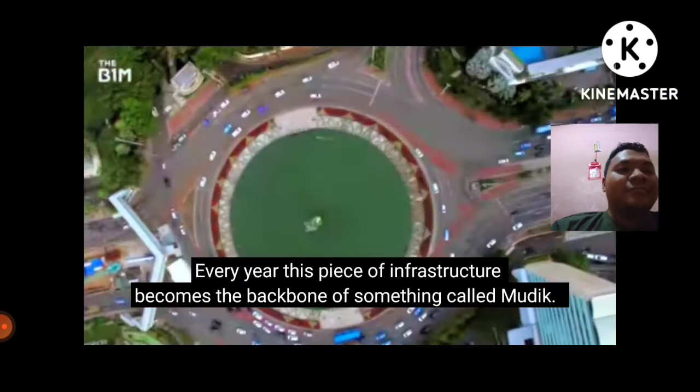Biggest annual migrations of people anywhere on Earth. Millions of Indonesians have started leaving urban centers for their hometowns and villages ahead of the Muslim holiday season of Eid. Every year, this piece of infrastructure becomes the backbone of something called Mudik, a giant homecoming for people all across Indonesia travelling back for Eid al-Fitr. Special services are laid on for trains, ferries and planes.

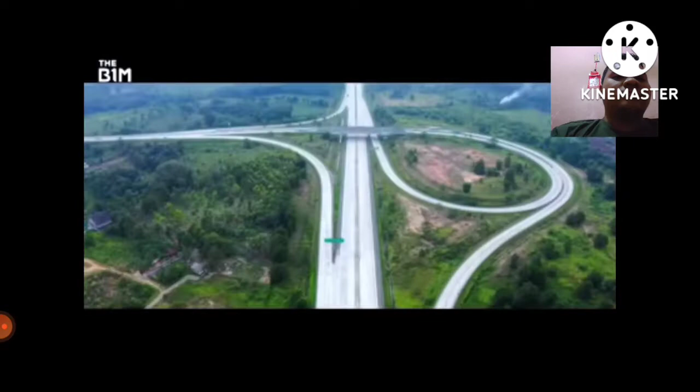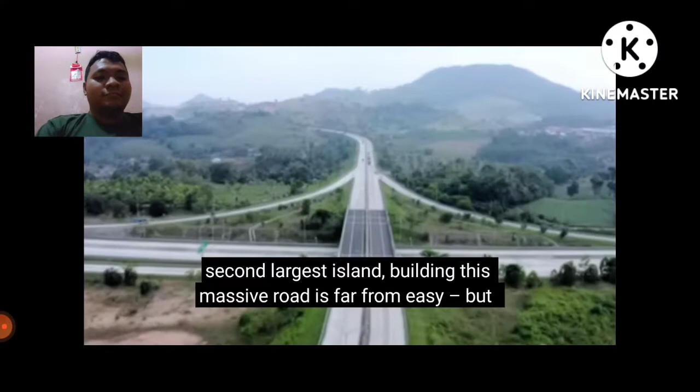There's even live coverage of the traffic as hundreds of thousands of people return to their hometowns and villages in Sumatra. It's a major test for Indonesia's roads and bridges, and it can be a bit of a struggle, until now. This is all thanks to one of the biggest infrastructure projects in Southeast Asia, a network of new routes across Indonesia that includes this, the Trans-Sumatra Toll Road, which, when it's fully completed, will span the entire length of the island. Weaving through the dense rainforest and tropical conditions of Indonesia's second largest island, building this massive road is far from easy. But it's already having a big impact on Sumatra, and in more ways than one.

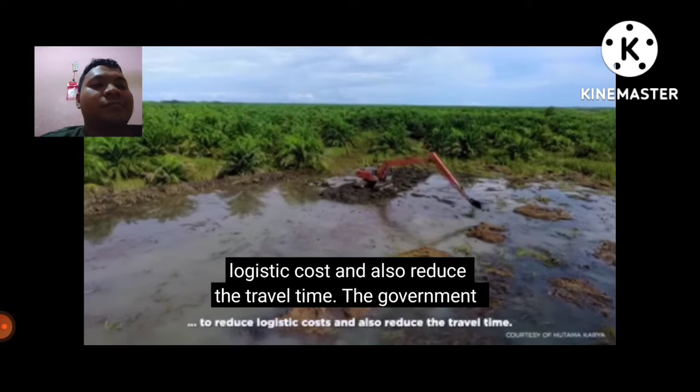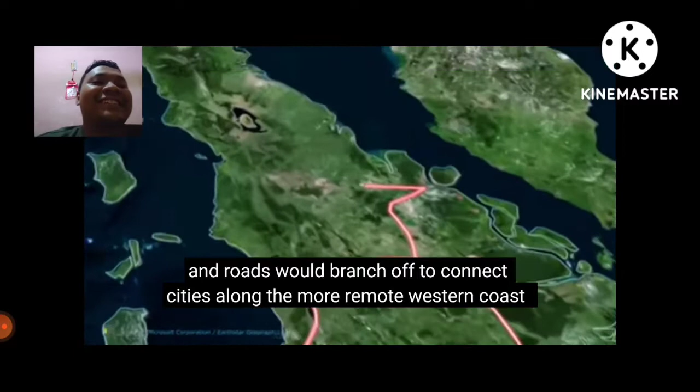The initial plan to build the Trans-Sumatra Toll Road is to reduce the logistic costs and also reduce the travel time. The government also wants to boost the economic growth of the island, of course. The plan was huge. The road would stretch for nearly 3,000 kilometres from the port of Bakauheni in the south to the city of Banda Aceh in the north. The main highway would provide a link from the south to the north of the island, and roads would branch off to connect cities along the more remote western coast, as well as towns and ports to the east.

It wasn't cheap. An eye-watering $37 billion was earmarked to complete the project over a nearly decade-long construction period. The contract was given to Hutama Karya, and work began in 2015. Now, if you were to imagine the ideal conditions to build a road in, it would probably look something like this. First, you take a nice long flat stretch of ground and make sure there weren't any rivers or other roads in the way which you'd have to build bridges over.

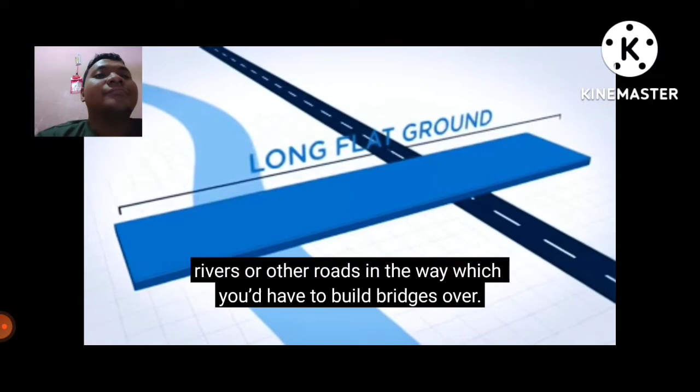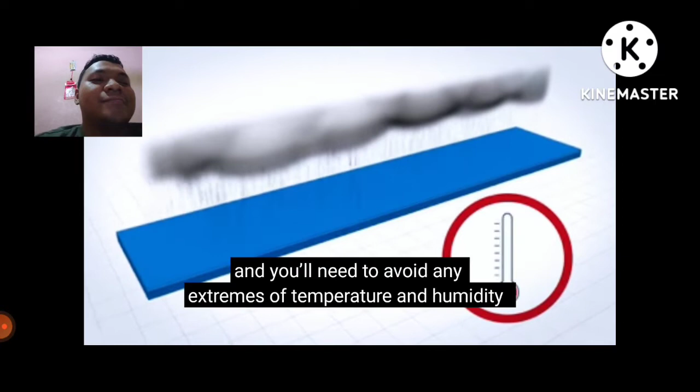Ground conditions are pretty important. You'll need strong, dry, well-compacted soil which can stand up well under the weight of all your traffic. Water's a big no-no as it can seep into the ground and weaken the foundations, and you'll need to avoid any extremes of temperature or humidity, which can also stress and degrade the quality of the road. Finally, to make your life easier, you're going to want to make sure that the land you're building on is clear and obstacle-free, so you don't have to waste time clearing a path. So, what's it like in Sumatra?

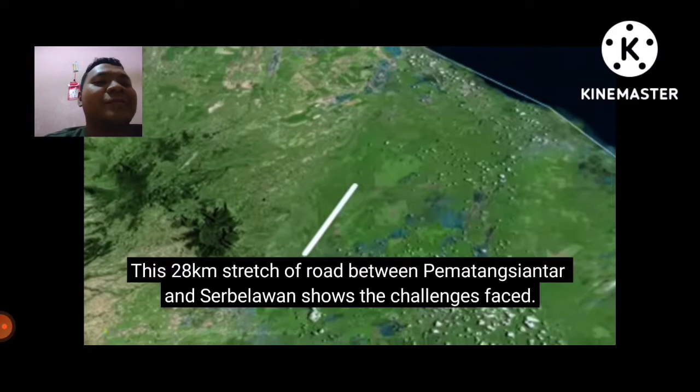Huge parts of Sumatra are covered in dense rainforest, which throws up pretty much every engineering challenge possible. This 28-kilometre stretch of road between Pematangsiantar and Serbelawan shows the challenges faced. This key stretch of the route links the major city of Medan to the industrial port of Kuala Tanjung and the nearby tourist hotspot of Parapat. The path for this bit of the road lay through dense remote rainforest, and even just getting the survey done for it was never going to be easy.

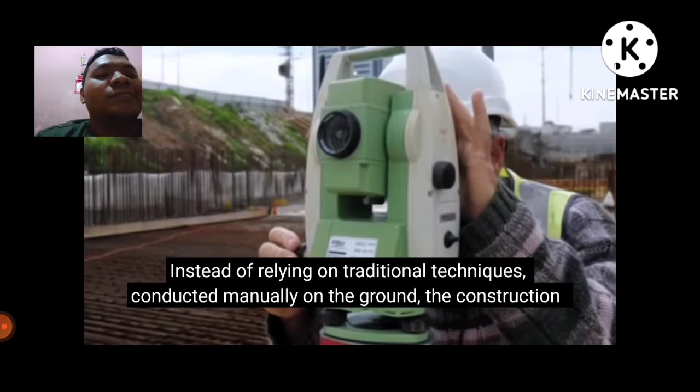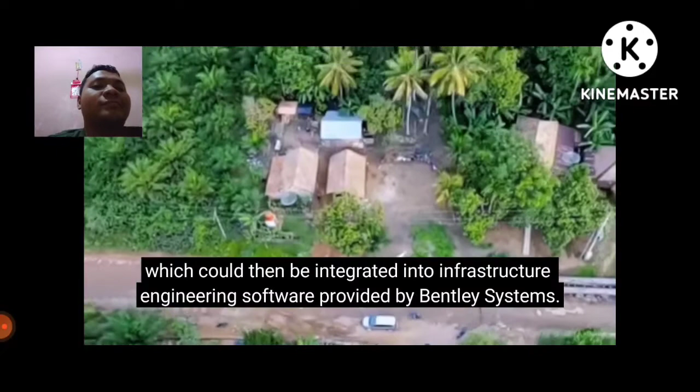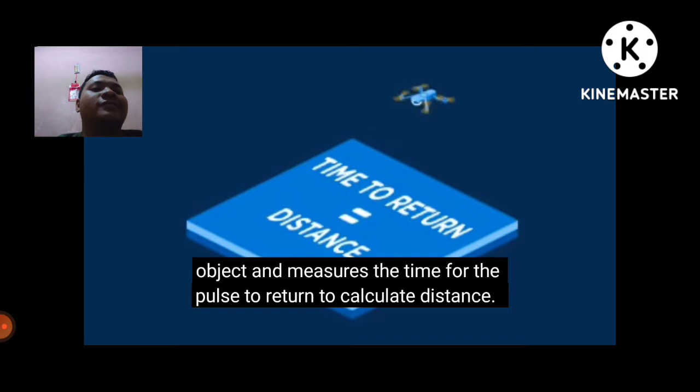Instead of relying on traditional techniques conducted manually on the ground, the construction team turned to LiDAR technology. That enabled them to create an accurate picture of the road, which could then be integrated into infrastructure engineering software provided by Bentley Systems. LiDAR is similar to radar and sonar in that it emits a pulse towards an object and measures the time for the pulse to return to calculate distance. With nearly 500,000 of these measurements made every second, the data that generates can create an incredibly accurate picture of the ground.

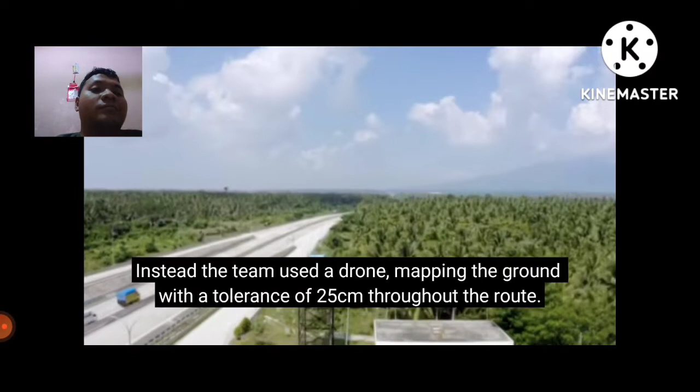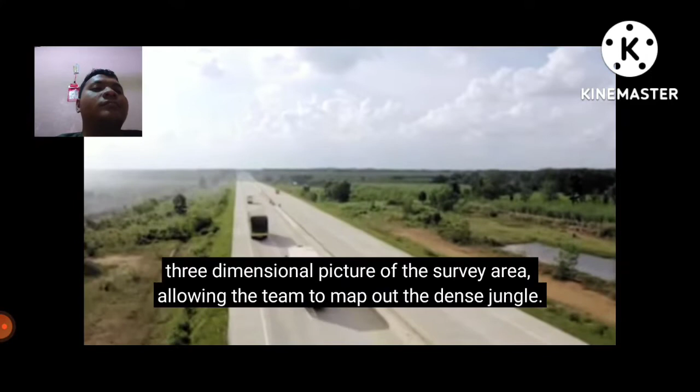LiDAR surveys are usually conducted from aeroplanes, but that was quickly ruled out as an expensive and impractical option for the Trans-Sumatra Road. Instead, the team used a drone, mapping the ground with a tolerance of 25 centimetres throughout the route. Aside from accuracy, LiDAR also has the advantage of using laser pulses rather than sound or radio waves to do its job. Just like rays of light passing through a forest, the light from the laser beam is able to pass through soft vegetation. The strength of the light returned is measured to give a three-dimensional picture of the survey area, allowing the team to map out the dense jungle.

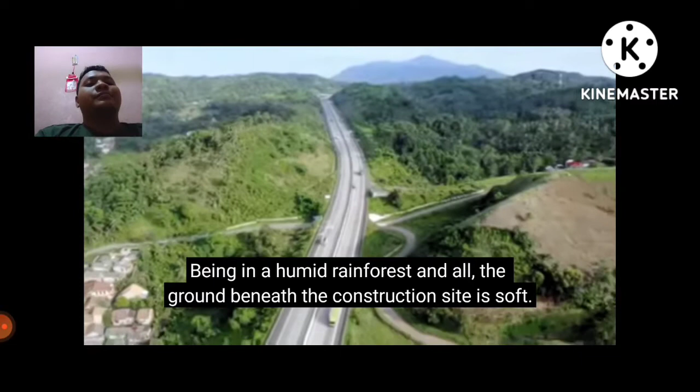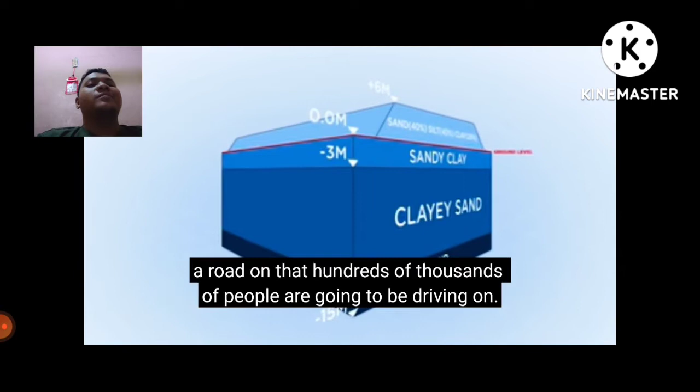The result was a survey time for this stretch of road that ran to just 28 days, nearly 100 days quicker than planned. But it's more than just above ground conditions the team had to work through. Being in humid rainforest and all, the ground beneath the construction site is soft. Soil samples showed areas of soft soil and clay 15 meters deep. You don't need to be an engineer to realize that that's not the ideal conditions to build a road that hundreds of thousands of people are going to be driving on.

It will be crossed heavily by the large trucks, and then it will create some cracks when the soil is not solid or not giving reinforcement. To add stability to the road, a fabric membrane known as a geotextile was laid under the 6-meter embankment.

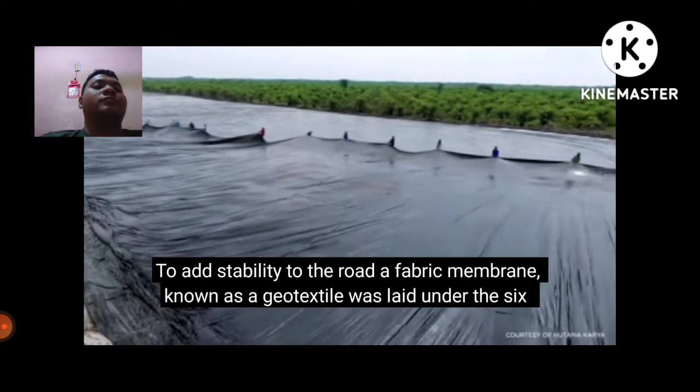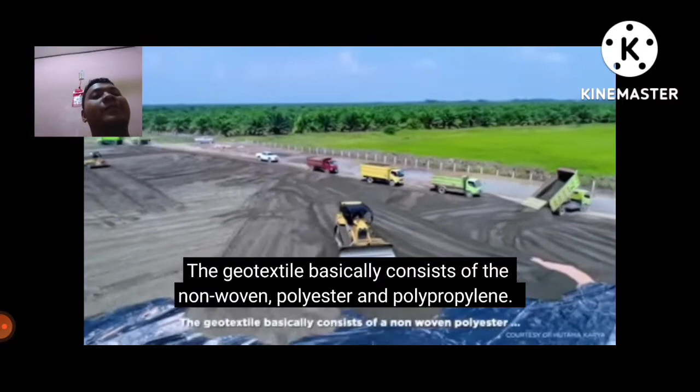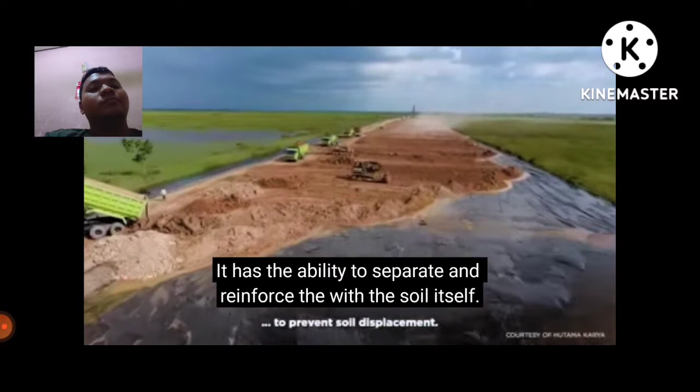This helped water filtration and reduced the stress on the soft underlying earth. The geotextile basically consists of non-woven polyester and polypropylene. It's like a layer that can be laid on the top of the soil to prevent soil displacement. It has the ability to separate and reinforce the soil itself.

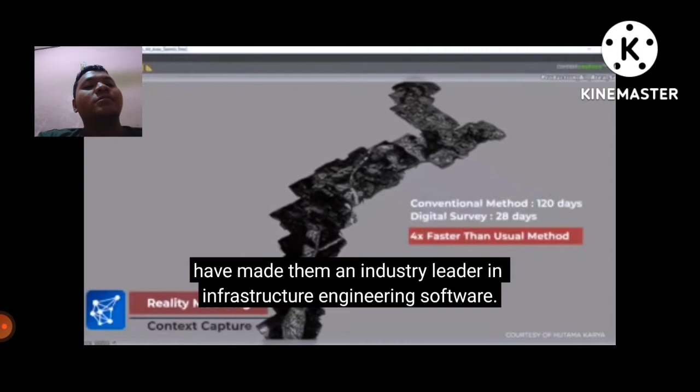Now, managing a project that includes everything from soil samples to LiDAR mapping needs a powerful set of tools to make sense of the vast amount of data. For this, the team at Hutama Karya turned to Bentley, whose suite of programs has made them an industry leader in infrastructure engineering software. Bentley's software is able to combine data from different sources, like LiDAR scans, to create a complete digital model of the project, enabling the project team to visualize the job in a variety of ways.

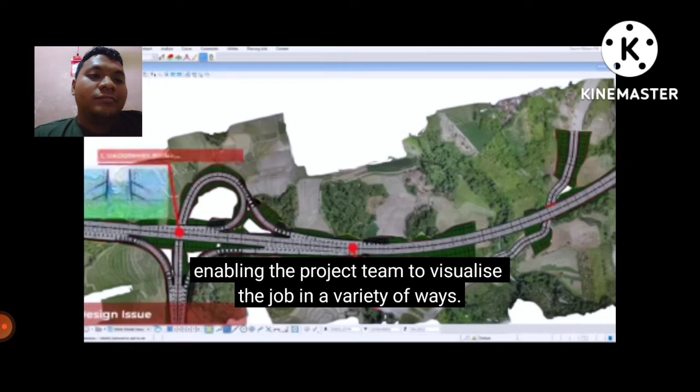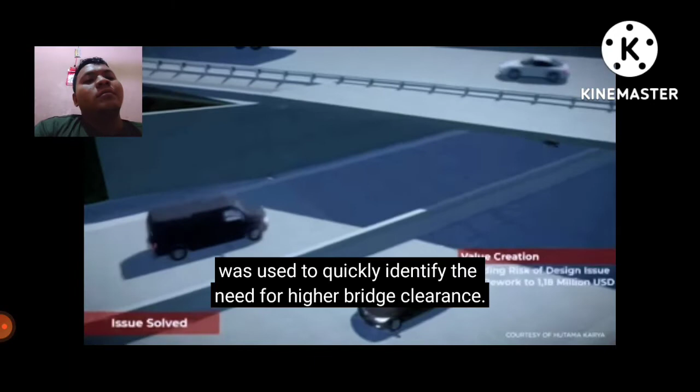Bentley LumenRT was used to create a visualization of the road, which was pretty central in identifying problems and then displaying them in very visual ways. In this case, the planned route clashed with an existing road, and a visualization was used to quickly identify the need for a higher bridge clearance. For a project that's reliant on state funding, advanced tech solutions like this are essential for keeping costs down.

We are very happy to use all of the resourceful technology and how we can bring the valuable advantage to elevate the digital transformation of the project, so we can ensure that this toll road will be in the best quality that can be used by all of the people for the next 40 or 60 years.

When the road is completed, it'll have major benefits for Sumatra's economy. As well as a booming tourist industry, the island boasts enormous mineral wealth, which once earned it the nickname the Island of Gold. Sumatra has huge deposits of oil, silver and coal, and is a major producer of tea, coffee, rice and corn. With journey times due to be cut in half by the road and logistics costs reduced by 30%, these export industries will all benefit massively from the project.

But who in turn will benefit from that economic development? I don't doubt that it will support economic development as it supports connectivity and stuff, but there is a worry that it will only be enjoyed by not many. Existing roads set to be bypassed by the new toll routes provide a valuable source of income for many of the island's poorer citizens. Now, suggestions have been made to try and replicate their businesses along the new highway.

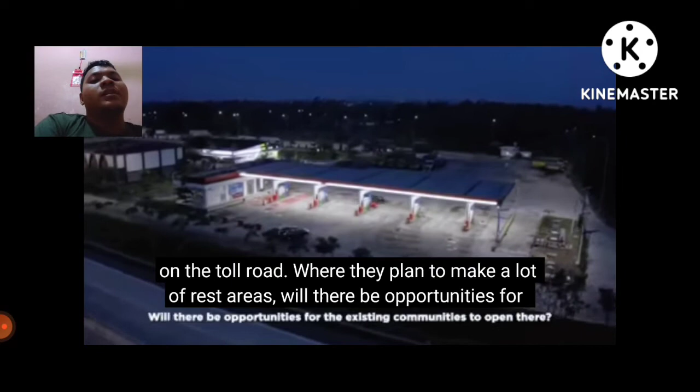Local communities have their small, medium businesses that have been there for more than 10-15 years, having stalls on the road, where a lot of people would come and stop by either for their lunch, their meals, or even just to have their cup of coffee when they're on a road trip break. There should be some sort of allocation where existing businesses can open in the toll road, where they plan to make a lot of rest areas. Will there be opportunities for the existing communities to open there? If they do, will there be subsidies for them as well?

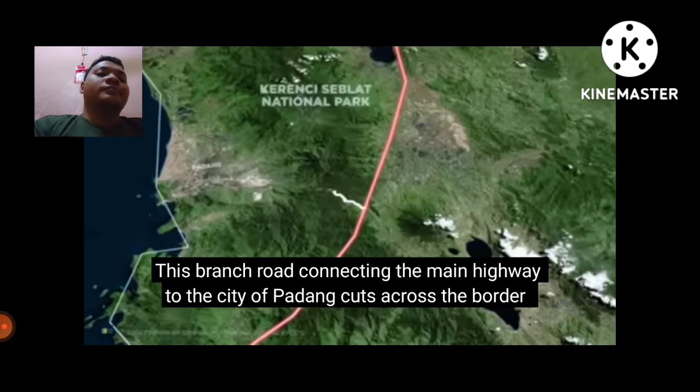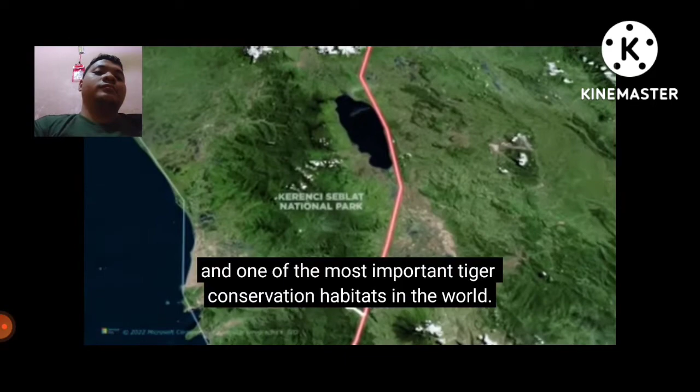As well as the human element, there's also concern for Sumatra's rich ecosystem, which hosts many critically endangered species. This branch road connecting the main highway to the city of Padang cuts across the border of the Kerinci Seblat National Park. That's one of the biggest of its kind on the island, and one of the most important tiger conservation habitats in the world. In terms of tigers, it's actually one of the key species of Sumatra that still roams very much in the wild. By fragmenting their roaming area through the road cutting, there would be an increase of human-wildlife conflict, where the tigers will roam into community areas.

In a place as verdant and wild as Sumatra, economic development will almost always be at odds with the natural environment, and there are no easy answers. Indonesia's economic growth has helped reduce absolute poverty levels from over 70% in the 1980s to less than 10% today. For that economic growth to continue across Sumatra, it's going to need reliable modern infrastructure like the Trans-Sumatra Toll Road, a key part of developing tourism, shipping and industry across the island. And it's important to note that it doesn't always have to come at a cost to wildlife.

We also conserve the natural habitat of elephants. So we develop a crossing for the elephants in another section. So we also consider the sustainability of the animals.

My personal view is that I'd like to be as hopeful as possible, as long as there will be opportunities for civil society organizations, those communities, to also take part later on, to have our suggestions be considered and be implemented.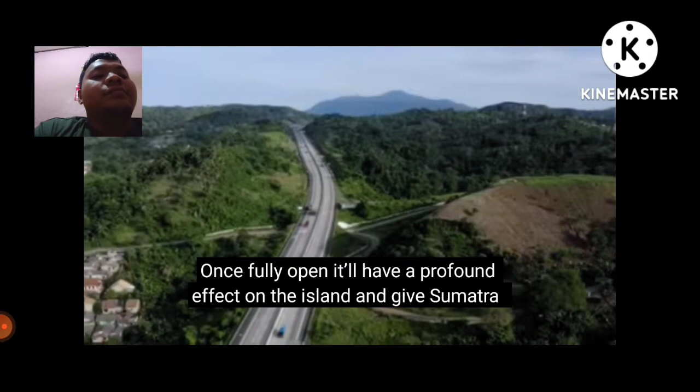Just over 650 kilometres of the road is currently operational, so there's still some way to go if it's going to meet its planned completion date of 2024. Once fully open, it'll have a profound effect on the island and give Sumatra a key piece of modern infrastructure that it needs if it wants to grow further. While the wider implications of this remain to be seen, anyone taking part in Mudik will definitely have an easier ride.